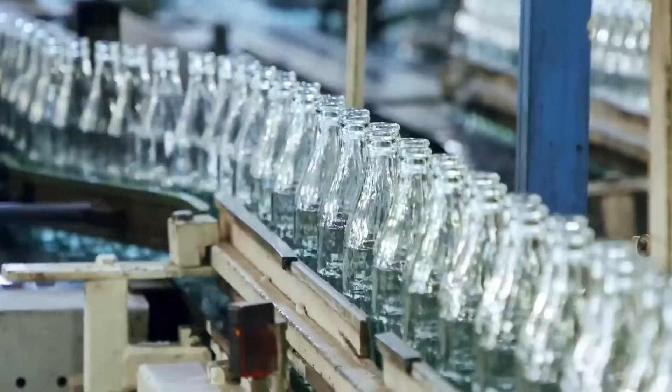2 billion tons of waste accumulate annually, with glass constituting nearly 20% of the total volume. Why does this material demand such special attention? At first glance, it seems like simple trash. But in reality, a single bottle can remain in a landfill for over 1 million years without decomposing. But this is just the beginning.

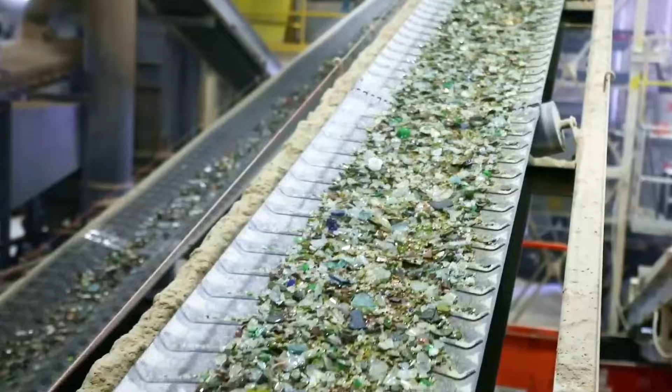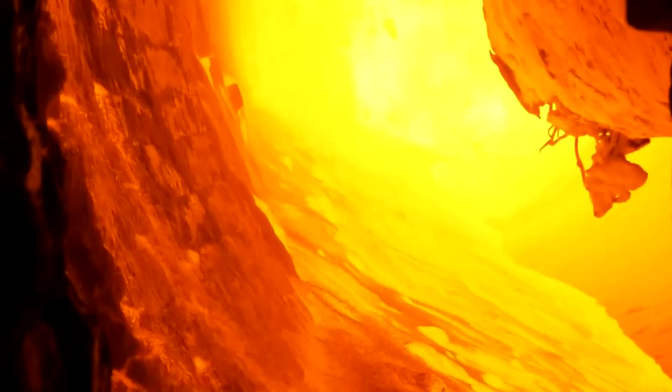Unlike other materials, glass can be recycled forever without losing any of its quality. Messy, sharp shards enter the system to be reborn as clean, shiny bottles. One can notice the continuous stream of glass moving on rubber belts inside one of the world's largest recycling factories. Hundreds of tons of material are brought back to life here every day.

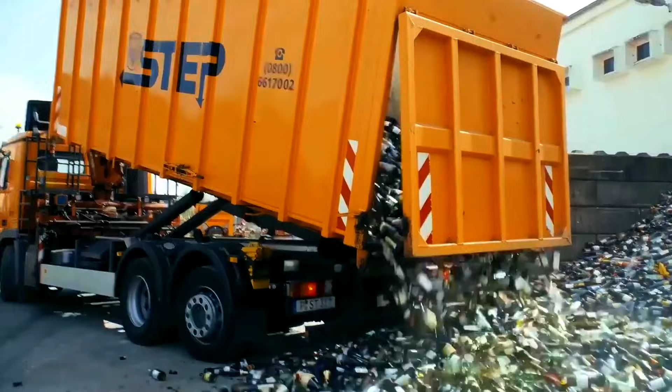The process is only gaining momentum. The secrets of the most sustainable material on Earth rely on precise engineering to unlock. The operation proceeds to the sorting phase. 10 to 20 cents is the precise financial value assigned to every single empty bottle returned by consumers in this automated system. Instead of ending up as useless waste, the container instantly turns into a valuable asset.

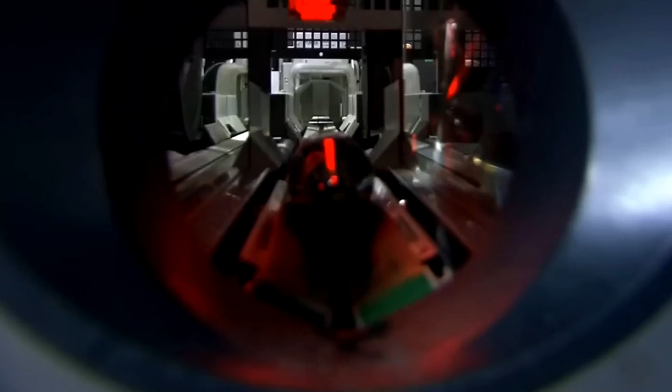This small refund drives the entire recycling economy in many European countries. Consumers simply place the empty beer or soda bottle into the machine for immediate processing. But this is just the beginning. Why is this source separation so critical compared to regular household trash?

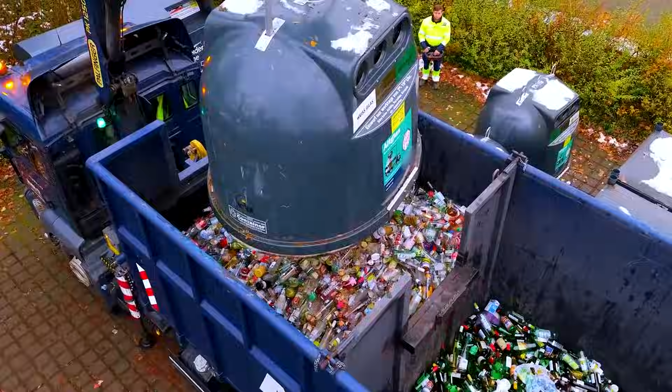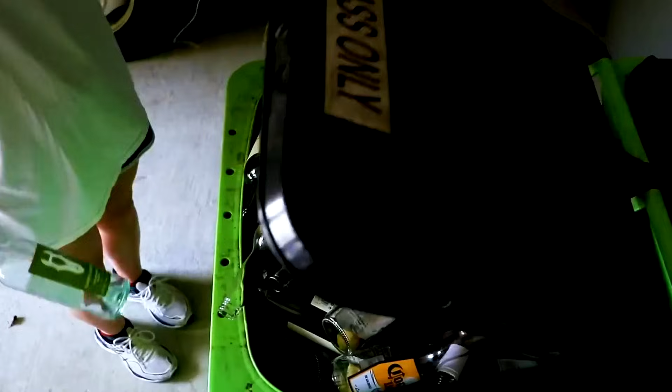To the casual observer, glass appears easy to retrieve from any general waste bin. But without this specific isolation, sorting becomes a costly engineering nightmare due to contamination from other household refuse. The reverse vending machine scans the object and sorts it into the correct category within milliseconds. This infrastructure provides factories with a stream of glass that is chemically clean and consistent.

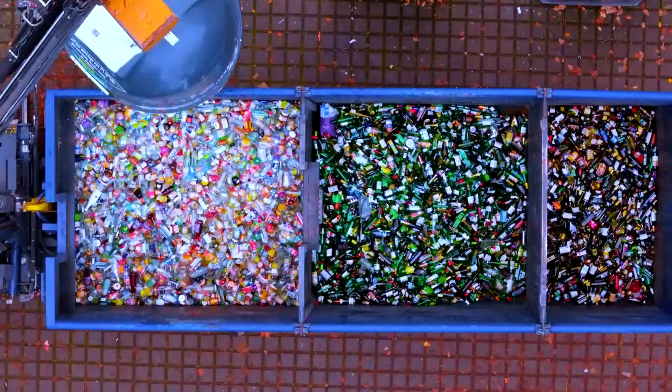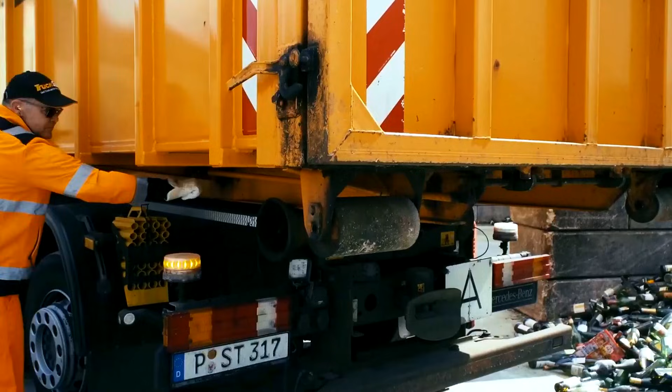While Europe has fully integrated this solution, the United States still relies on a patchwork of local systems. The process is only gaining momentum. Specialized collection companies dispatch trucks when the machines signal they are full. Large plastic bins, each holding thousands of empty glass bottles, require forklifts for loading onto the decks. One can notice how the heavy transport suspension compresses under the increasing mass.

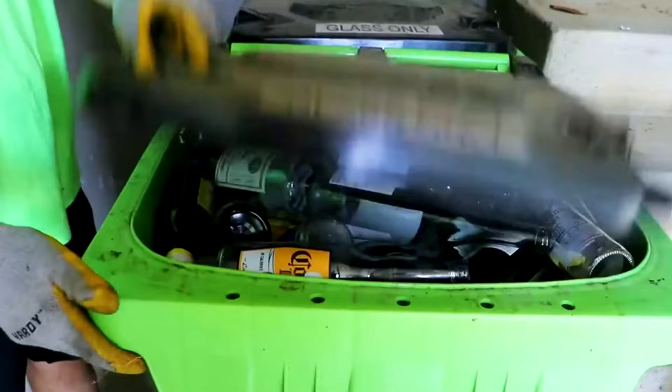A single full-size truck accommodates between 20,000 and 30,000 bottles in one coordinated trip. This aggregate volume equals approximately 10 to 12 tons of raw silicate material. Piles loaded with glass make their way from supermarkets and collection points to the central recycling plant. Each bin is packed tightly to maximize transport efficiency.

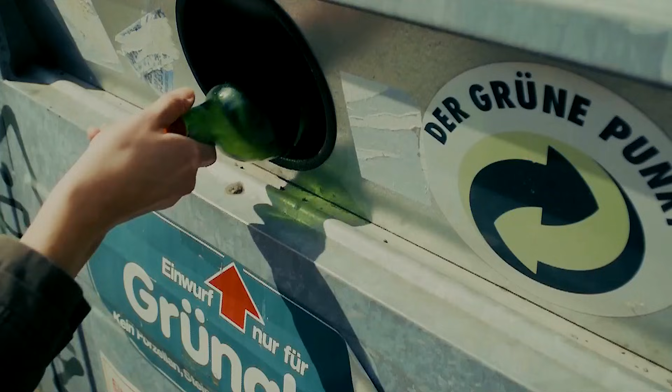The drivers back the heavy vehicles into the massive storage bay with precision. They release the load, sending a cascade of bottles tumbling down into the intake zone. At first glance, these piles look like chaotic waste, but in reality, they represent the essential starting point of the recovery chain. Dust slowly settles as the deafening noise of colliding glass fades away.

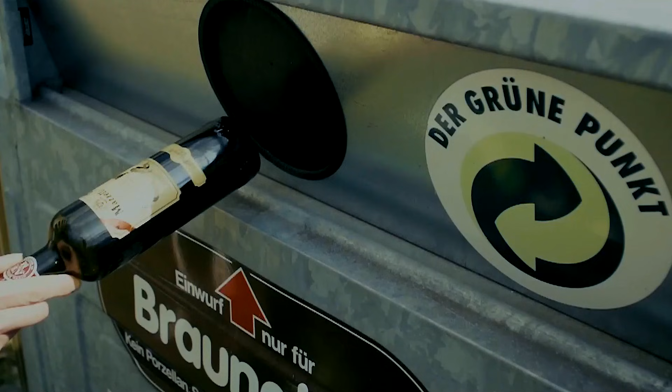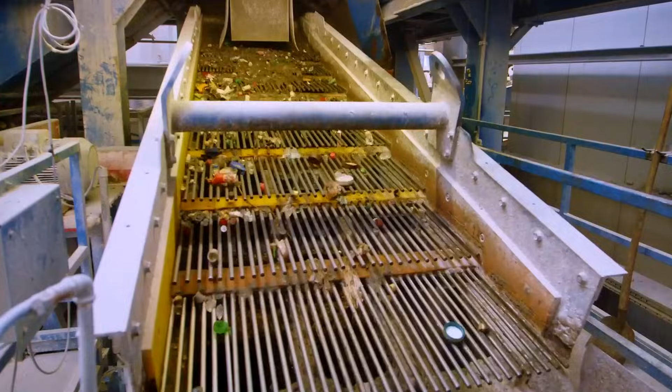It is visible how the industrial ground fills with colorful mountains of greens, browns, and clears. The shards sparkle under the facility lights, stacking together in huge mounds. The raw material now waits to be cleaned and crushed. Tens of tons of waste glass accumulate in towering piles before the recycling process begins. Why does the cycle start with such aggressive, heavy machinery?

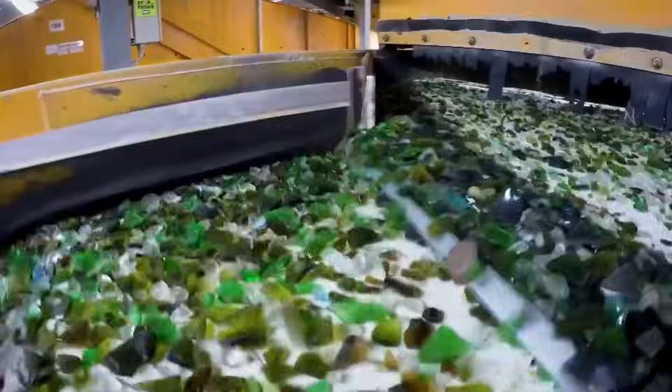Glass seems to require delicate handling, but to process such immense volumes, massive loaders must scoop up huge loads with their buckets and carry them across the yard. With a thunderous crash, the material is finally dumped into the plant's feed hopper, sending a chaotic cascade of shards down the steel chute. Instantly, the steel conveyor starts moving, carrying the stream of glass mixed with dirt and sand deep into the facility.

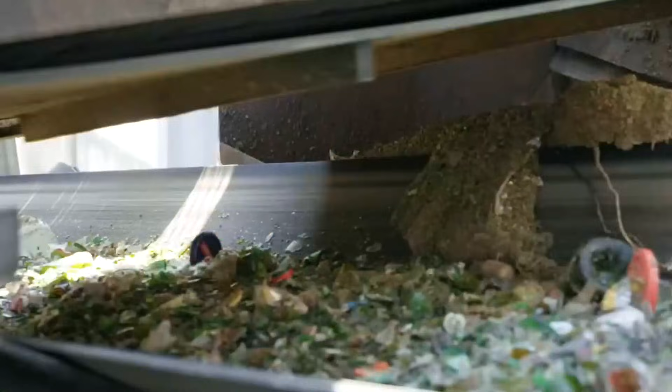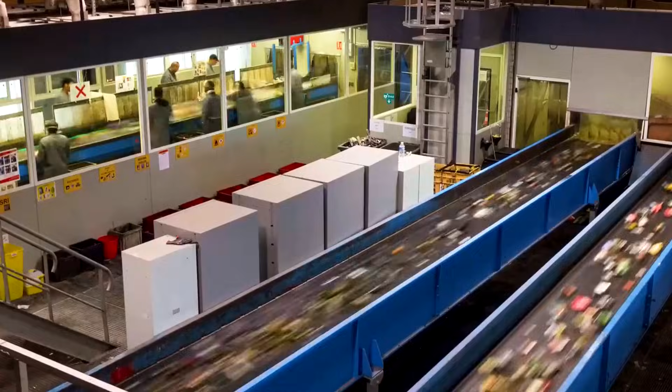The first stop is the vibrating screen, where powerful mechanical shakes separate out dust, grit, and tiny particles. At first glance, it seems obvious that machines should handle the entire flow, but in reality, larger contaminants require human eyes. Along the conveyor, workers stand ready, carefully pulling out paper, plastics, and other debris. One can notice how their hands move with practiced rhythm to clear the line.

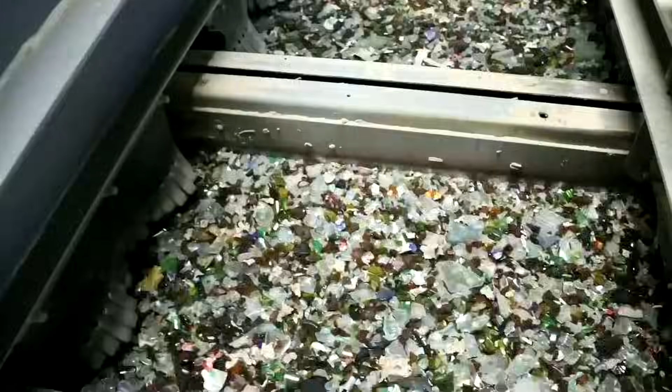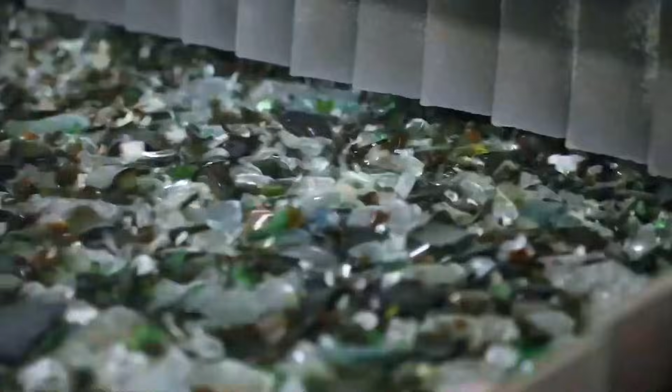This blend of mechanical screening and manual labor produces a cleaner batch of material, preparing it for the next step in the recycling journey. Do you know what is still hiding in that pile of broken glass? The flow moves rapidly. The answer is bottle caps. Luckily, most of them are made of metal, allowing easy removal via a high-powered magnetic separator.

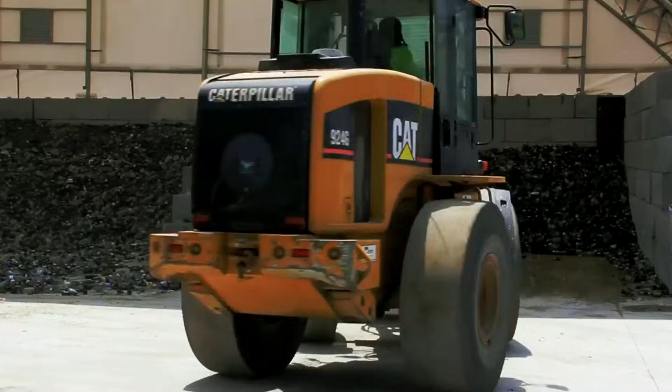The principle is simple. The strong magnetic field grabs the bits of steel while the glass keeps moving down the conveyor. Thanks to this step, the glass is now about 80% clean. But this is just the beginning.

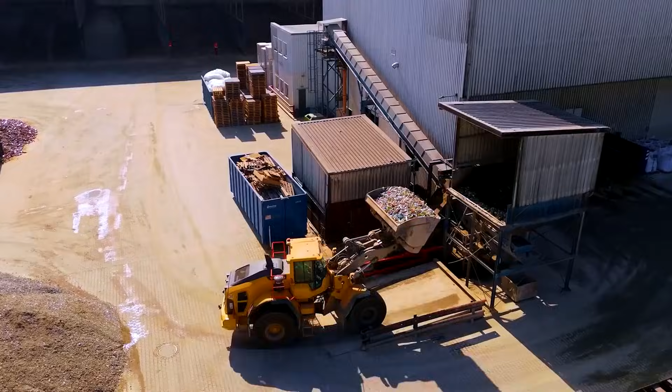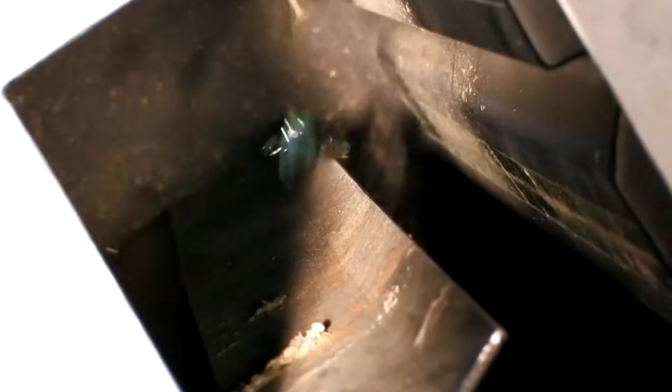Once most of the contaminants have been removed, the glass moves on to the next crucial step. To ensure uniformity, larger pieces are fed into a hammer mill, a massive machine with high-speed rotating hammers that smash the glass until only tiny fragments remain. Any pieces that are still too big are automatically detected and sent back through the mill until they reach the right size. This makes sure the entire glass stream is uniform with no stragglers slipping through.

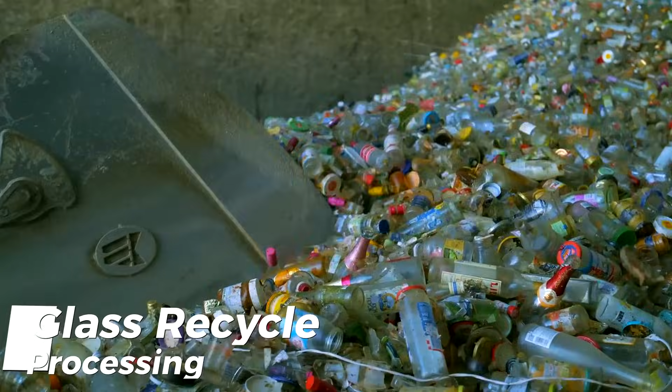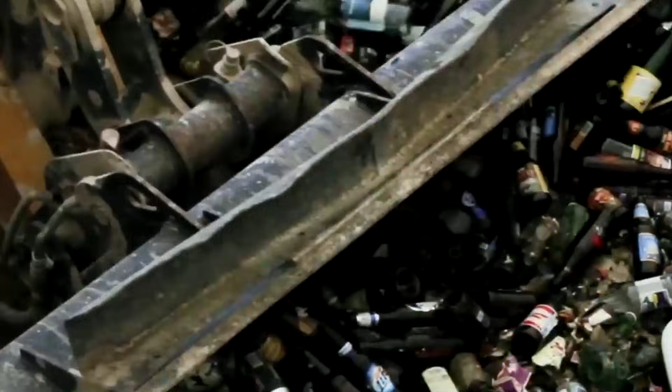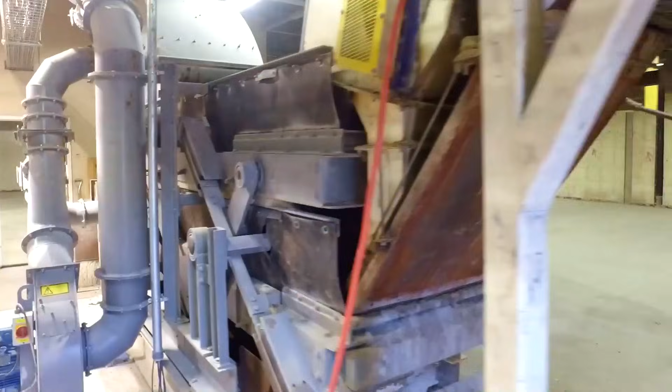The process creates cullet, fine sparkling glass particles that look almost like man-made sand. Because it is broken down so small, cullet melts much faster in the furnace, saving up to 40% of the energy compared to raw materials. After that, the cullet is carried to a powerful suction system, where it is blasted with a strong stream of air. It gets more complex further on. This airflow strips away and blows off any leftover label fragments, leaving the glass even cleaner.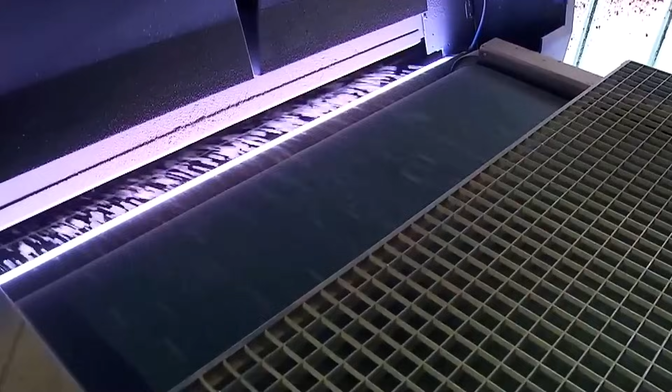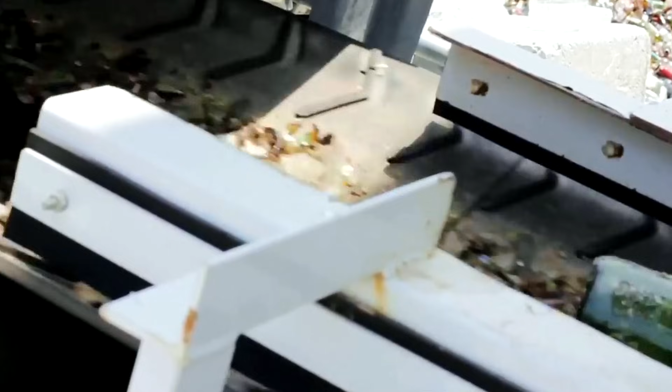One can notice the cullet moving into the optical sorting system, the most precise step in the entire process. Glass cascades down like a shimmering waterfall past the sensors. Laser sensors continuously scan each tiny fragment to detect its color and composition. The moment brown, green, or stray ceramic shards are identified, the system instantly fires a precise puff of air, shooting it into a separate stream. Tens of thousands of pieces are processed every single minute. This ensures that the color is sorted with perfect accuracy, as the slightest mix of the wrong shade ruins quality.

From here, the sorted material continues moving along the conveyor belt. Consequently, the tiny glass particles are directed into separate storage areas, each divided by color. There, they gradually pile up into massive stockpiles, waiting to be transformed into brand new glass bottles without haste.

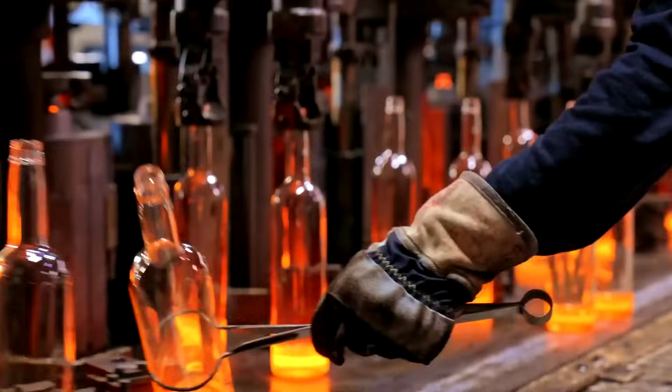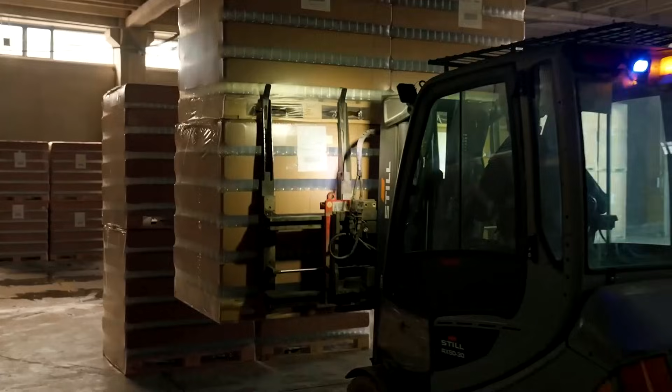20 to 70% is the proportion of recycled glass, or cullet, that makes up the foundation of every new batch waiting to be transformed. Pure silica sand provides the essential clarity, while soda ash, or sodium carbonate, reduces the melting temperature to save power across the line. Limestone joins the mix to strengthen the final structure and ensure stability. At first glance, using cullet seems optional compared to fresh ingredients, but it allows the melt to flow faster and cuts energy use by up to 40%.

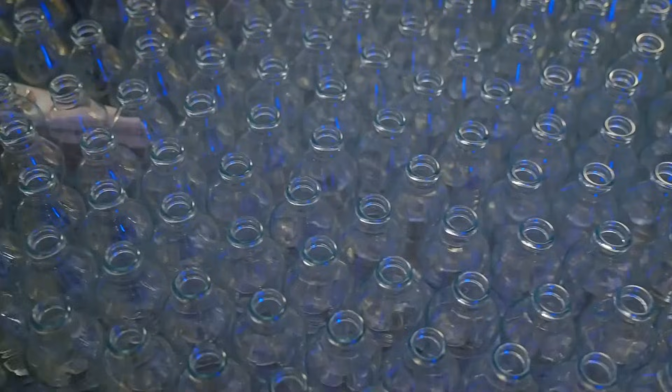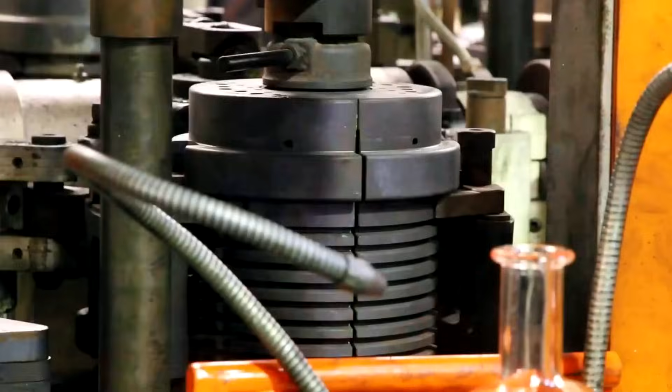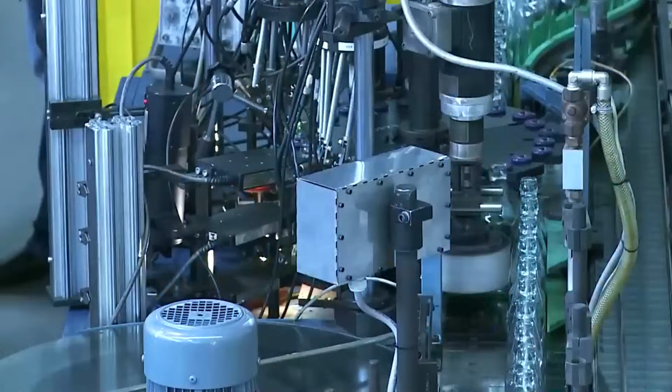But the composition involves more than just these basics. Manufacturers introduce dolomite, alumina, or metal oxides to adjust the color and physical properties. Why is the addition of recycled cullet strictly calculated before the melt? The mix undergoes precise blending to guarantee uniformity before reaching the furnace. Adding just 10% more cullet reduces overall energy consumption by about 3%, significantly lowering carbon dioxide emissions.

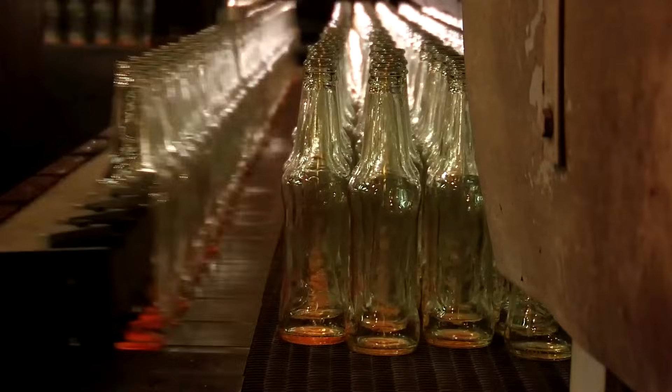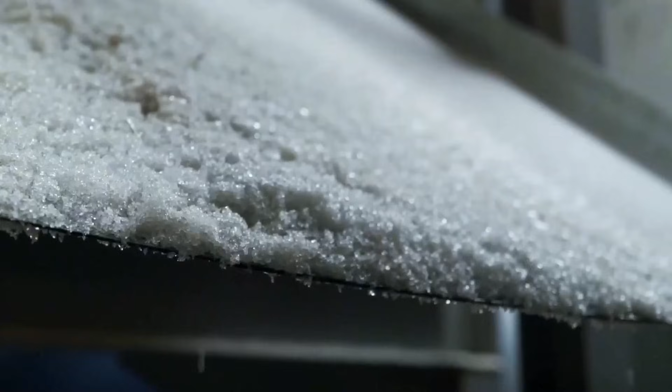One can notice how the blended material enters a massive gas furnace where temperatures rise to about 1,750 degrees Celsius. The mixture begins to glow, surpassing the heat of molten lava from a volcano. Workers inside the facility must wear heavy fireproof suits and protective gloves to operate near the equipment. The surrounding heat reaches nearly 3,000 degrees, creating an environment that is almost unbearable without protection. Carefully monitoring the process prevents any deviation in the melt.

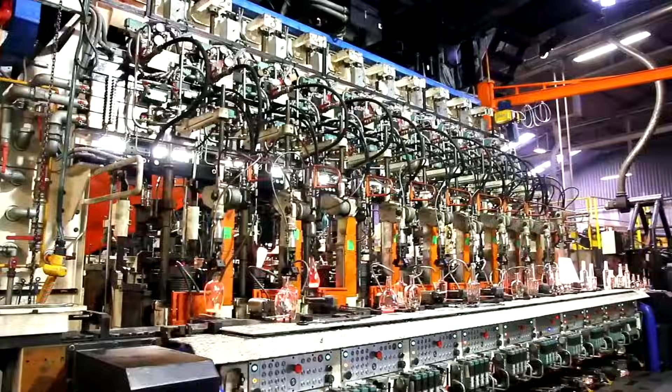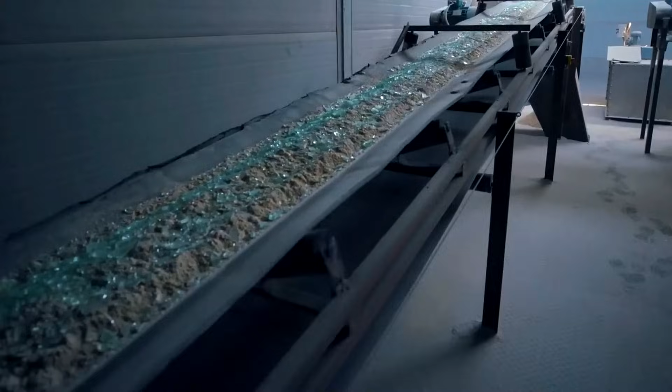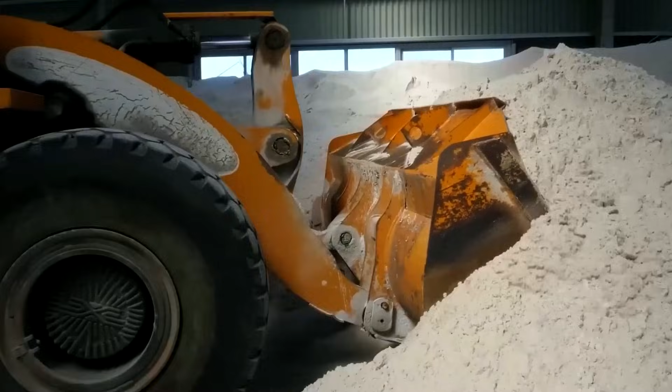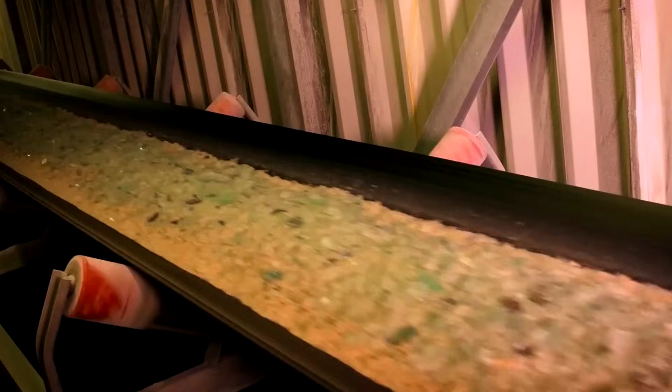It does not end at this stage. The mouth of each crucible is sealed to maintain thermal intensity and control the melting process. At first glance, the sand seems to melt instantly, but in reality, the transformation requires 24 hours to turn the grains into a substance flowing thick like lava. The brilliant glow at the bottom of the furnace reveals liquid glass, a dense, shining mass that has reached the perfect temperature and viscosity. For the next 5 hours, the material remains molten. This allows any remaining gases to escape, ensuring the highest purity in the final material.

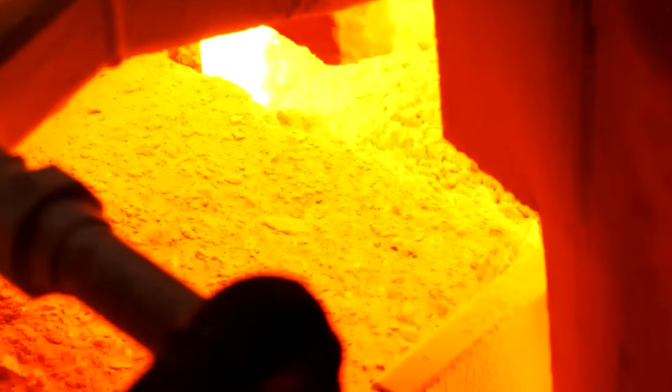Because liquid glass requires a precise vessel to take shape, mold creation becomes the priority. Engineers use advanced computer-aided design software to calculate every line, dimension, and thickness with high precision. Molds are manufactured from cast iron or alloy steel capable of withstanding temperatures of up to about 1,400 degrees. These forms are prepared to receive the melt and shape it from the inside. Transition to the next level.

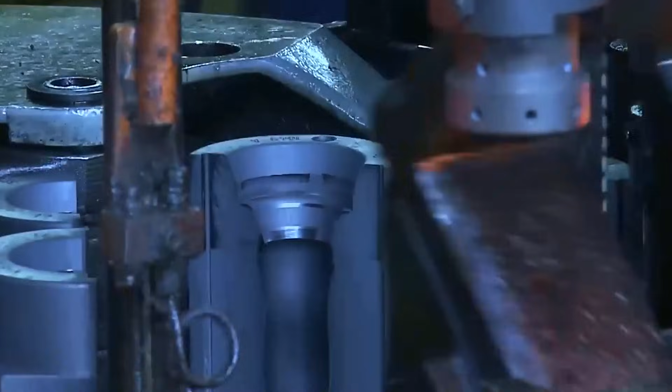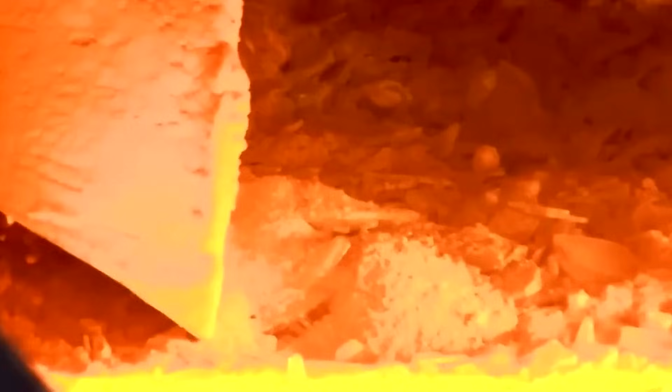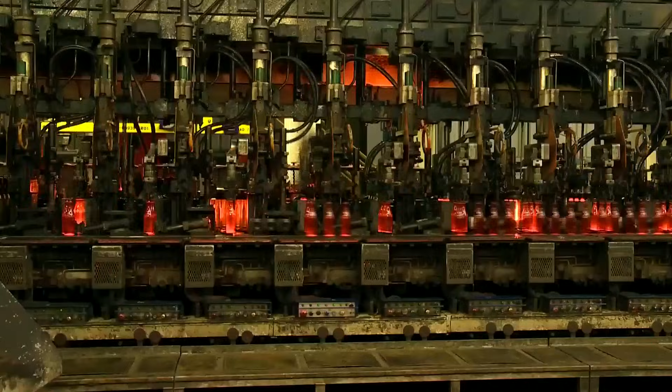The completed molds are installed into the blow blow production line, which serves as one of the most widely used and reliable methods for shaping hollow products like food jars. The process begins by dropping molten gobs, cut from a continuous stream, into the initial blank mold. One can notice the intense orange glow of the glass, which reaches temperatures of around 1,100 degrees Celsius. A jet of compressed air blows from above, pushing the material against the walls to form a bubble-like structure known as a parison.

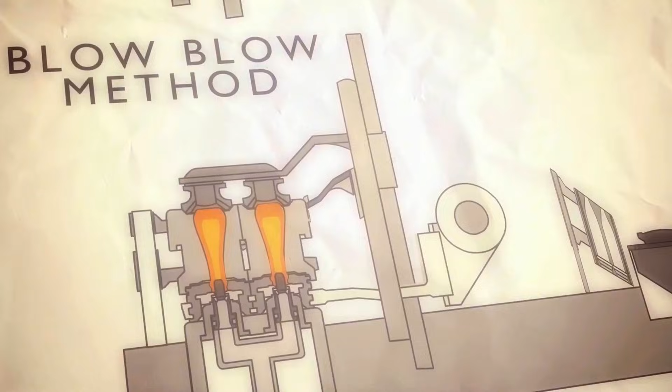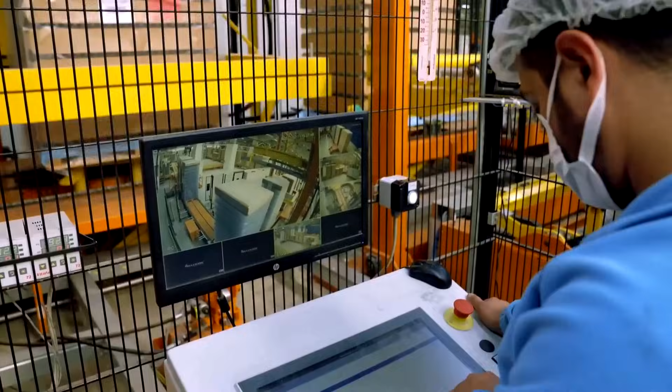The glowing glass is gently transferred to the final mold situated just a few inches away on the line. A second burst of compressed air shoots directly into the center, stretching the softened material until it presses tightly against every contour. This ensures the bottle takes its full shape in just a matter of seconds. Everything only gets more complicated. But behind the scenes, every valve and sensor synchronizes with incredible accuracy. The timing is calibrated down to 1,000th of a second.

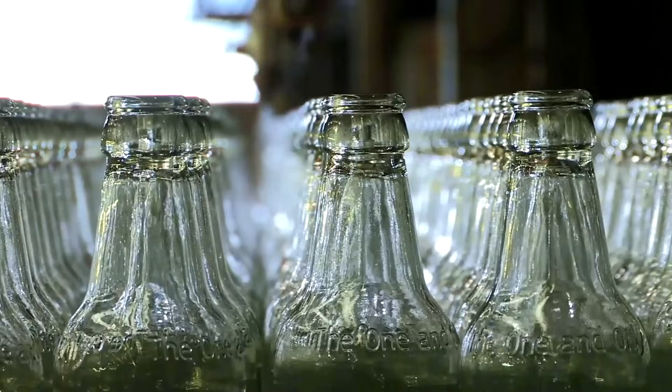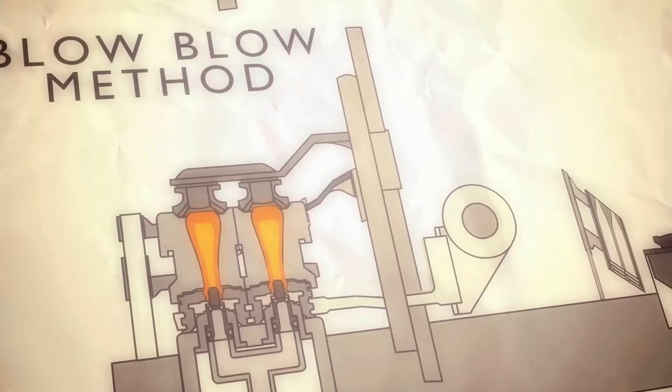It is visible how the newly released bottles radiate a deep red heat, shimmering in the dark like glowing metal rods. Such precise control allows the facility to manufacture hundreds of thousands of nearly identical units per day. Robotic arms move with seamless programmed precision to lift each bottle and place it onto the conveyor belt. The scene unfolds in calm silence without a hint of haste. The process is only gaining momentum.

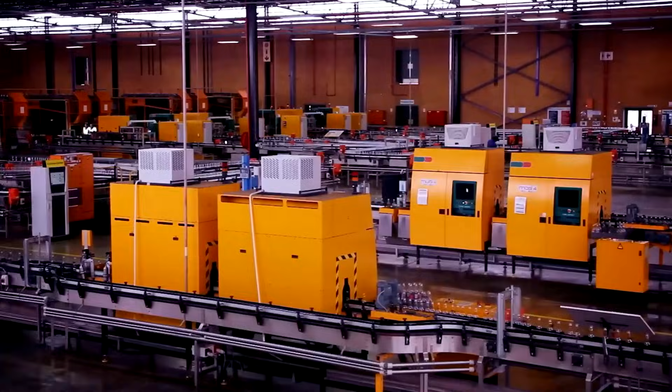The belt guides the containers through a long yellow tunnel where the temperature lowers little by little. This cooling stage may last several minutes, and sometimes even stretch to tens of minutes. Quick cooling would shatter the glass, but this gradual process allows the material to settle safely.

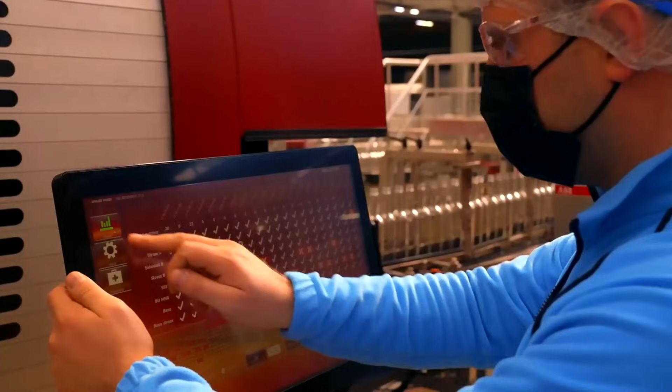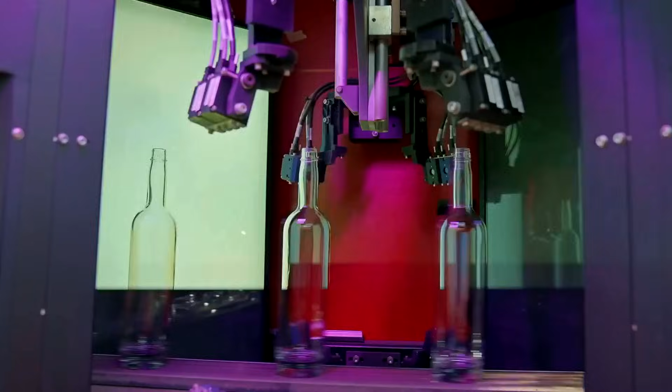Therefore, an array of optical sensors and high-speed cameras examines each unit in real time to detect defects like cracks, bubbles, or scratches. Any bottle showing the slightest warp is immediately flagged and pulled off the line. The system rotates each item to inspect the mouth with mechanical probes and sensors. Only containers that pass this strict check are allowed to move forward. And this is not the limit.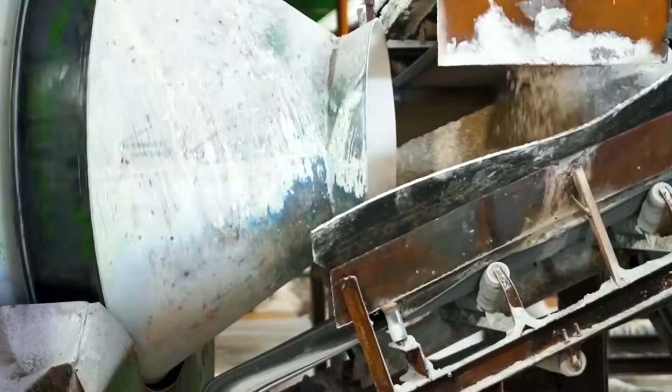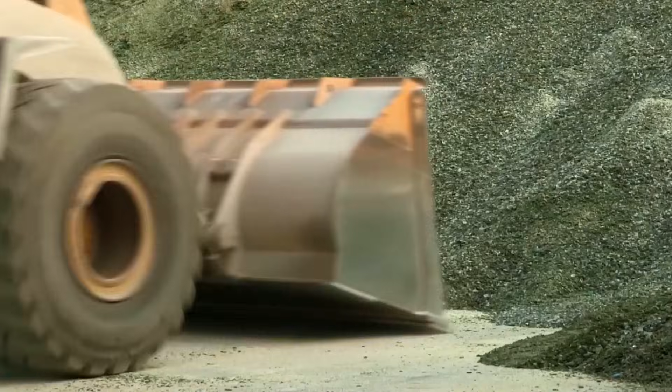Robotic systems organize thousands of bottles with ease. The palletizing section takes charge of the batch for accuracy and uniformity. One can notice how a clamp mechanism with suction cups lowers to grip a full row and sets it carefully onto the layer. To protect against impact during handling and shipping, a sheet is placed between each level.

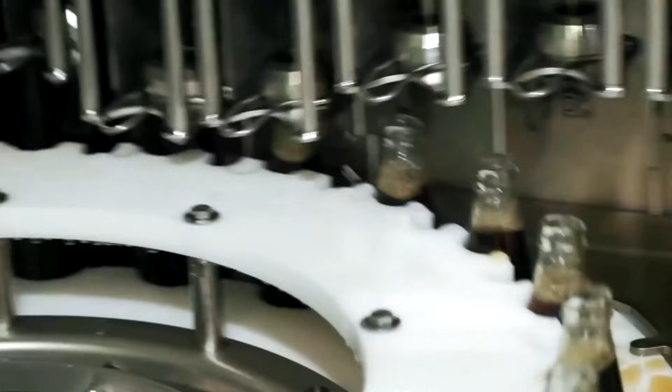An automated wrapper secures the stack in film and tags it with a code that corresponds to its production batch. The glass pallets move into storage, neatly stacked and ready to travel across the globe to serve in daily life. Millions of glass containers navigate the complex production line every single day to hold the world's most iconic soda.

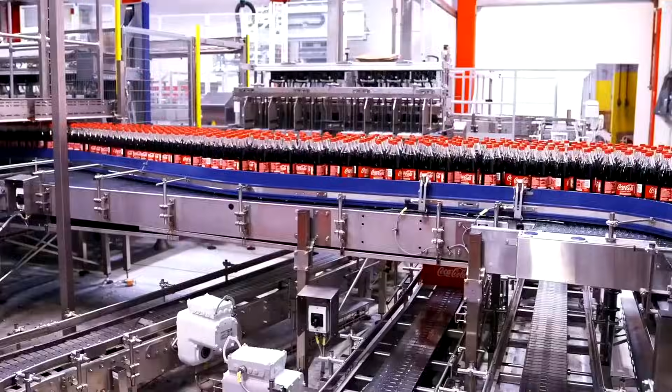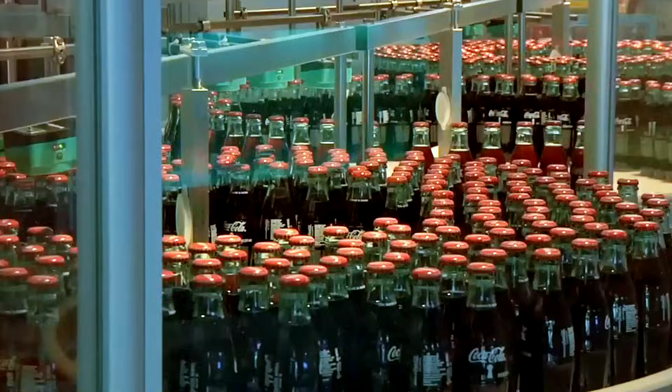Why do automated nozzles fill each unit down to the exact milliliter? The conveyor moves at a breakneck pace, making such accuracy seem physically impossible to the naked eye. This precision is necessary because carbon dioxide gas is injected simultaneously to lock in the signature fizz. Before this filling stage, high-pressure hot water and steam blast the interior surfaces to eliminate any microscopic dust or bacteria. But this is just the beginning of the journey.

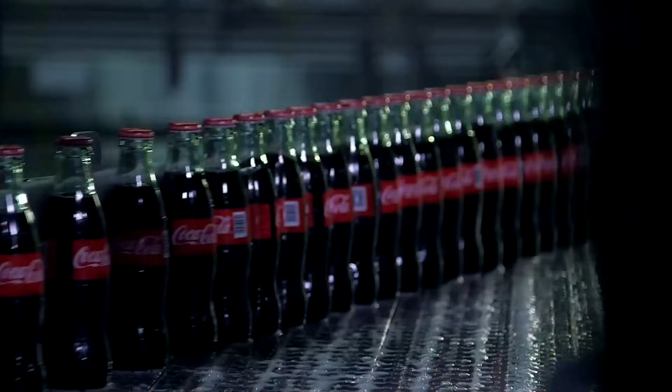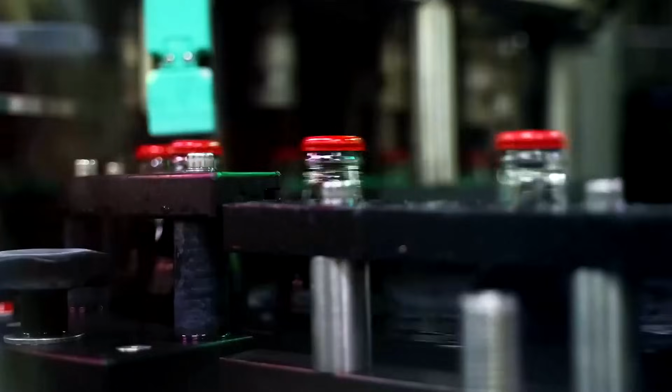The bottles head straight to the capping station immediately after filling. At first glance, capping seems like a simple mechanical impact, but in reality, it is a critical safety barrier. Crown caps are pressed onto the rims by precision machines to ensure the contents remain secure. High-precision sensors integrated into the line inspect every cap for tightness to prevent even the smallest leaks.

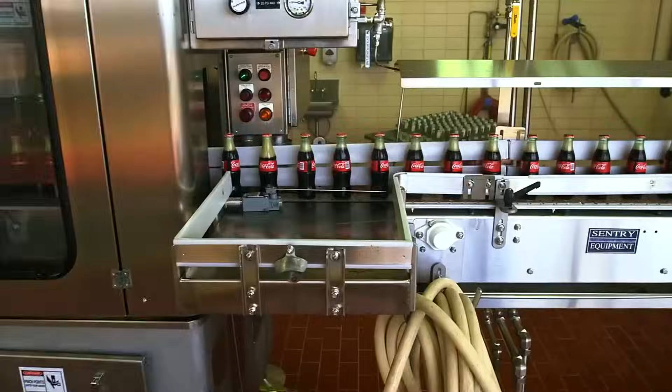One can notice how the bottles continue gliding smoothly along the conveyor belt like a programmed assembly. A high-speed camera system checks for cracks, overfilling, or misapplied labels to ensure absolute quality. The items move through each stage of the line with a steady, precise rhythm, eventually reaching the water spray station, where a high-pressure jet of cold water targets the neck of each bottle. Everything only gets more complicated.

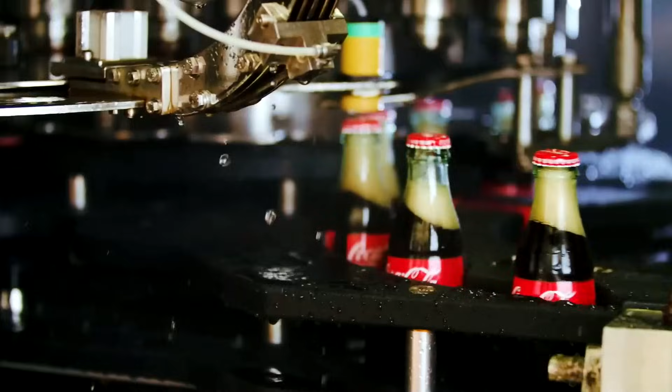Therefore, the perfectly sealed containers are packed into cartons to complete the assembly process. Pallets loaded with the finished product move into cold storage, awaiting the final leg of their trip. They are ready to be shipped to millions of stores worldwide, from small roadside shops to luxury hotels. The production cycle concludes here, leaving the beverage ready for distribution.

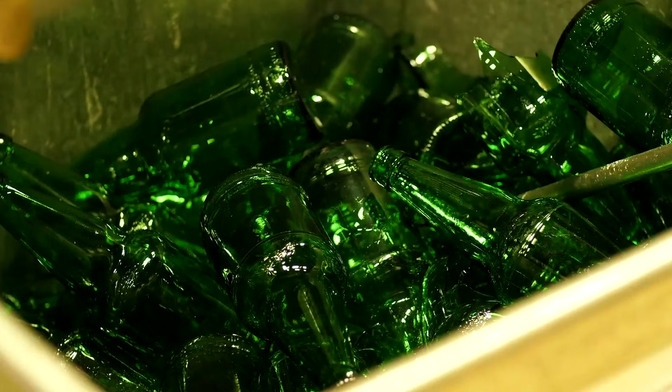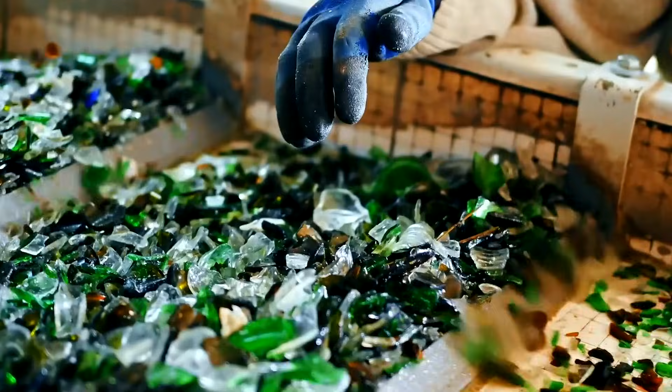The bottles look identical to virgin glass. However, using cullet drastically reduces the furnace energy consumption. It is visible how automated systems align the vessels for packaging. The technology turns waste into a chemically pure resource. This process guarantees the preservation of raw materials. Thus, the broken shards have regained their function. The finished product enters the supply chain.